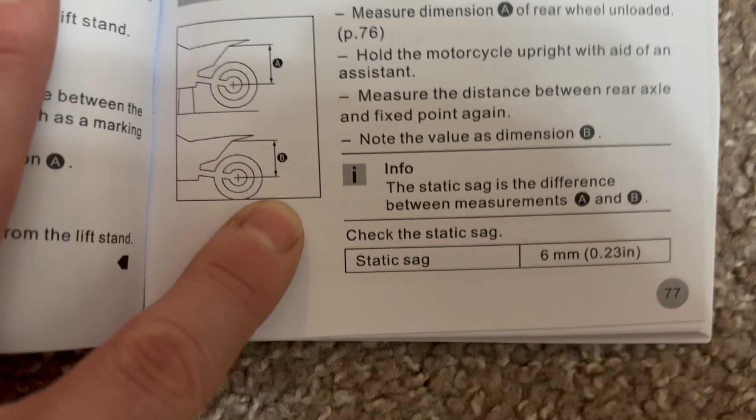I had a question that came up from someone else about if I have an owner's manual, which I do. Okay, here is the first page of the rear suspension, noting the static sag. That's without the rider sitting on it. Next page is mentioning to adjust the spring preload if needed, and my manual pages are falling out. Stop the video if you want to read the page.

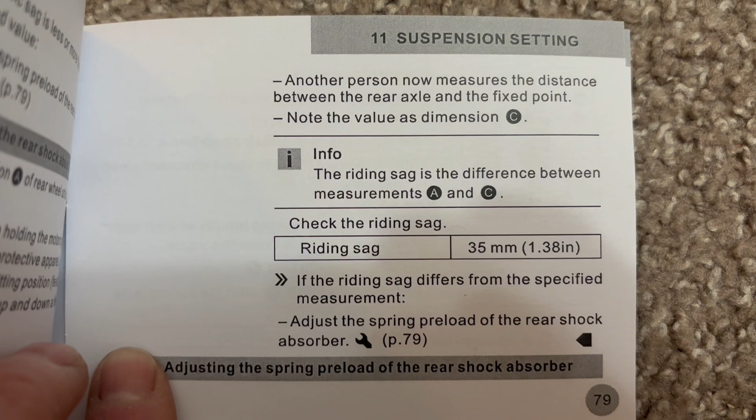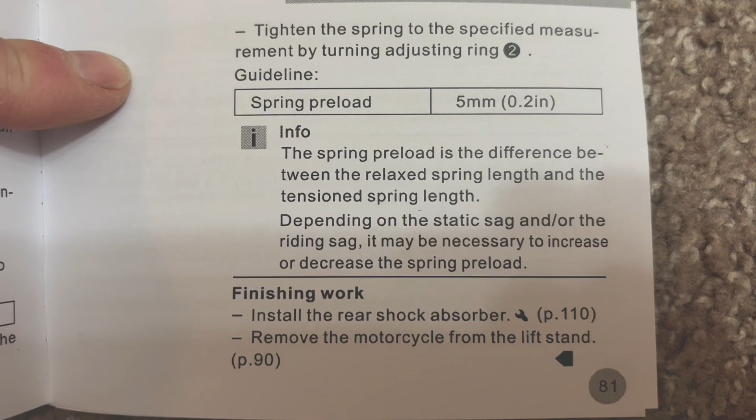The riding sag for the rear shock is 35 millimeters. Moving on, we have another page that mentions that the spring preload is 5 millimeters when the shock is unloaded. Next page here is for the front suspension, noting the air pressure. It is 10 psi to 40 psi, but there is no static sag or rider sag mentioned for the fork.

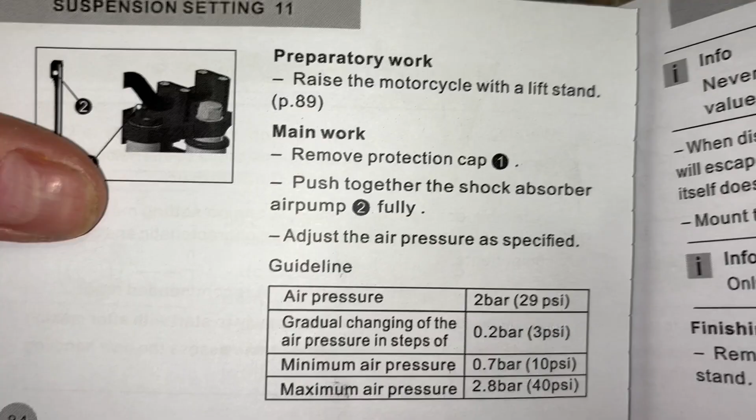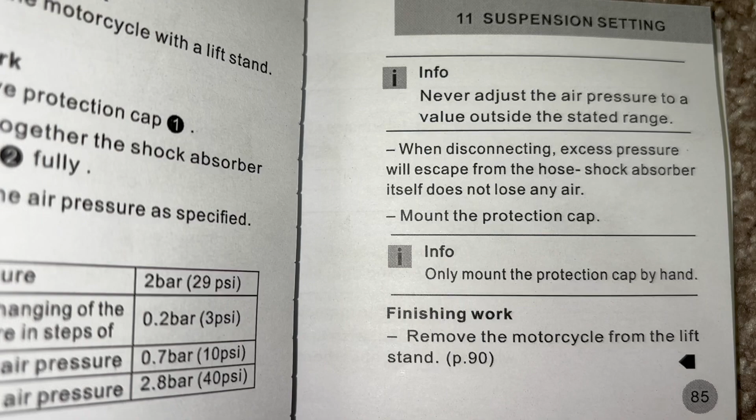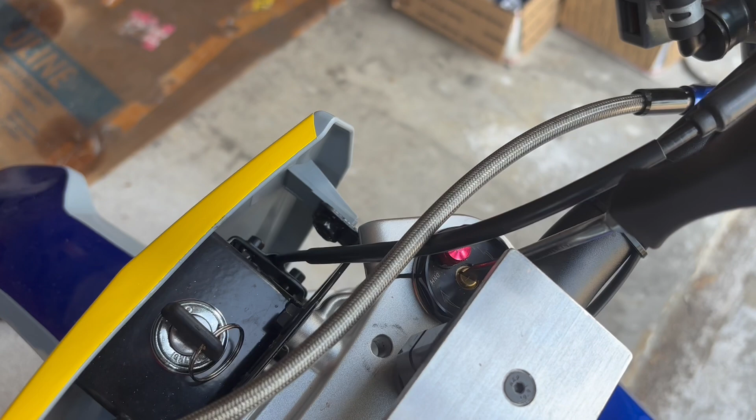That's all it mentions. There is no mention of what the stock damping settings are, just the rider sag and how to adjust it. I'll go over the physical adjustments on the bike next. Back here on the bike, you can see the plate I mounted after changing the handlebar, but I want to point out something I did that's a functional change.

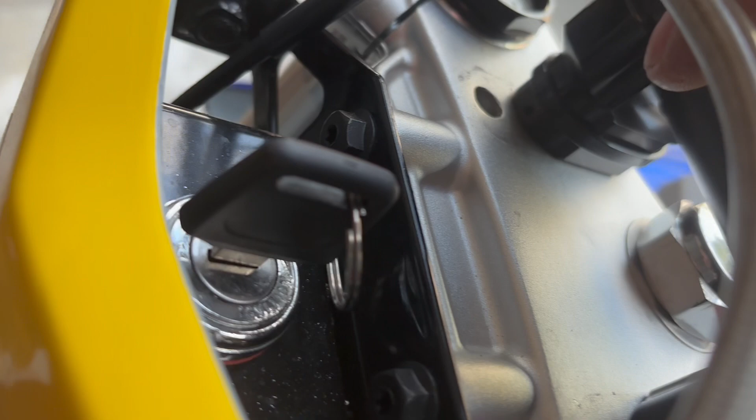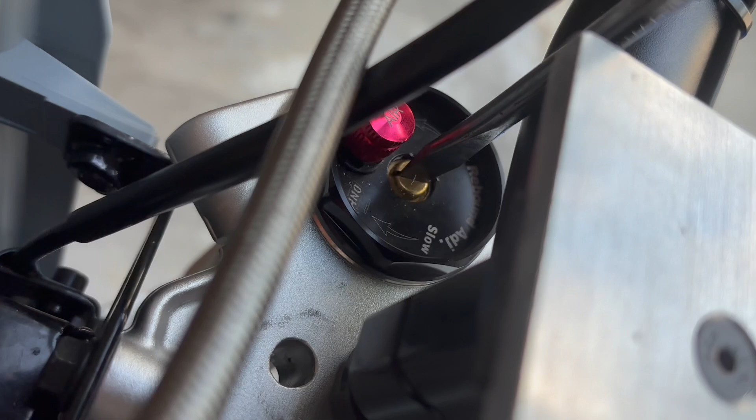You can see the hole down here where I formerly had the handlebar clamps. It used to have 2 bolts on the handlebar clamp. Now I'm using a mount system down there that only uses a single bolt. That moved it back a little bit. So the handlebar physically moved back a little bit. Why is that good? Well, because it allows me to get a screwdriver down here to adjust the suspension settings.

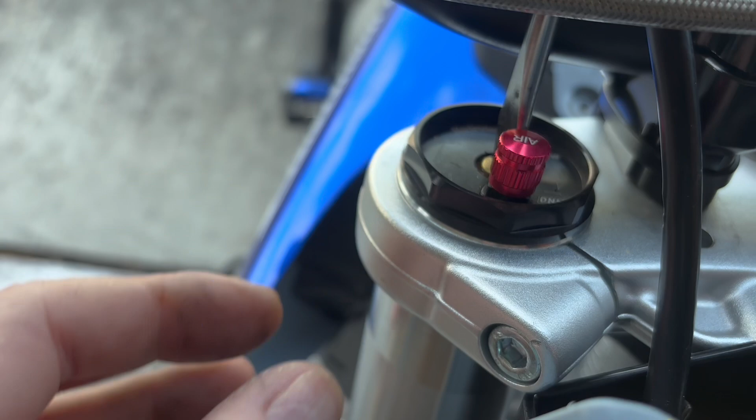Stupid cables are kind of in the way. So that's for the damping adjustment. So this is for the rebound on top. So now I can get a screwdriver in there and change my settings. Anyway, back to the topic of preload. The only way to adjust the preload on the bike is with air pressure.

So you take the caps off here, and using the previously shown adjustment page, you can adjust the air pressure in there. The downside is you need an accurate air pump up to about 42 psi roughly to be able to adjust your preload. Once you're done with that, you can put the caps back on.

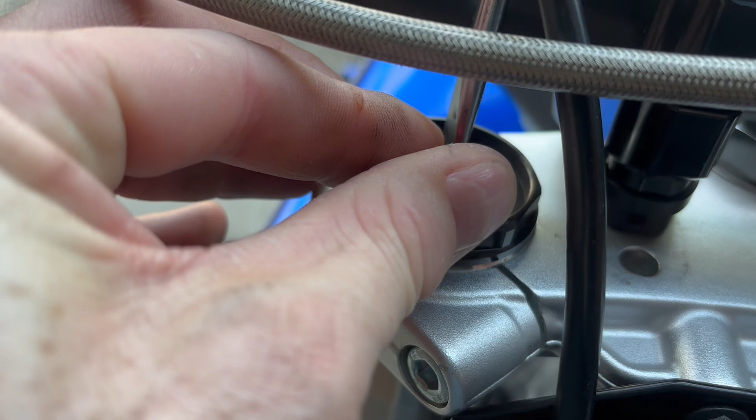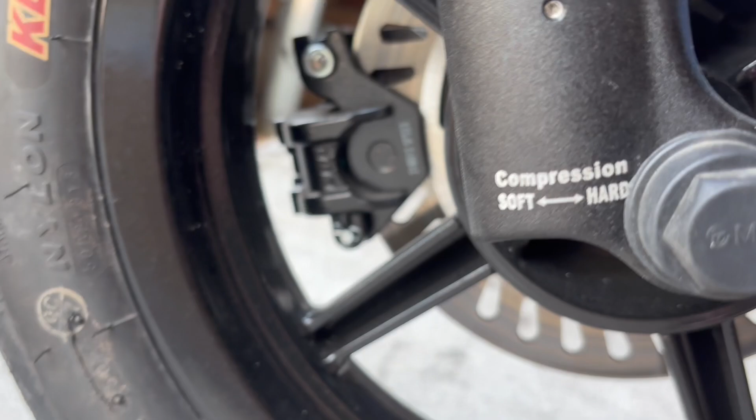I would prefer a mechanical preload adjustment with a wrench because I don't like looking for a pump. Not a common tool I carry, and definitely not to measure the range of such small air volumes. They'll change rapidly. Anyway, that is the changes that I made on the front. In case you're wondering, the compression damping adjustment is down here on the bottom of the fork. You would have to get in there with a driver to adjust that.